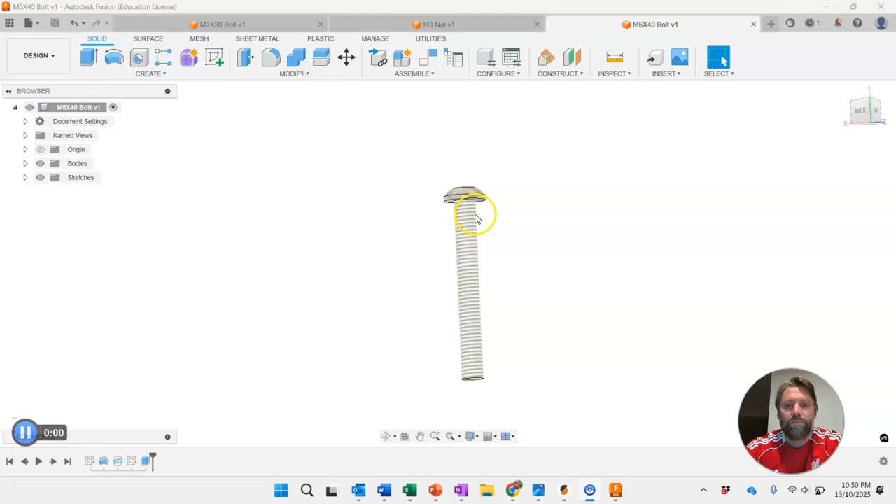Okay, so we're going to create a matching nut for this M5. It's going to be slightly different, right? We're going to use a dome head nut, because it sits out the back of the wheel, sort of exposed, and you might end up rubbing your hands on that part of the design. You want to make sure it's sort of covered and protected, so we're going to use a dome head nut. It's a nice way to finish off a part, so I'm going to use a couple of these dome head nuts.

So I guess when we create this in Fusion, jump back across, we're going to start off with a revolve. We're going to start a sketch and draw it from either the right or the front plane.

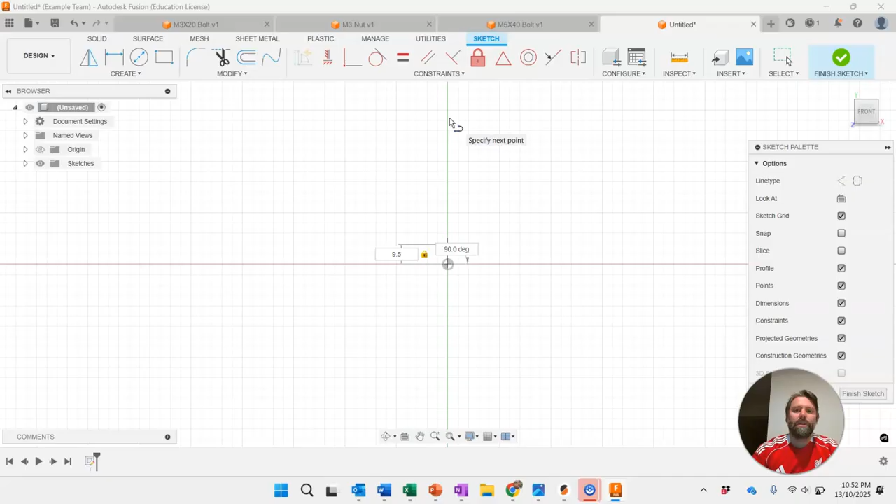And this part, I'm drawing a line to start with, which is going to be 9.5, and that is the overall height of that nut. So that's the very top of the dome there, and that's the very bottom of that. This is going to be a 7mm diameter, so we're going to come out 3.5 millimeters.

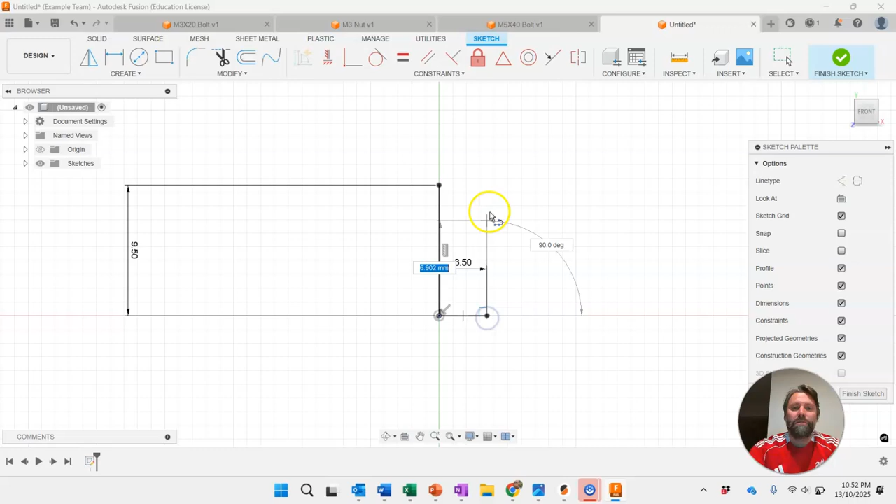And we're just going to draw a line directly upwards, and the length of it doesn't matter at this point. We're going to create a circle now, and it can be anywhere along this line except for the middle.

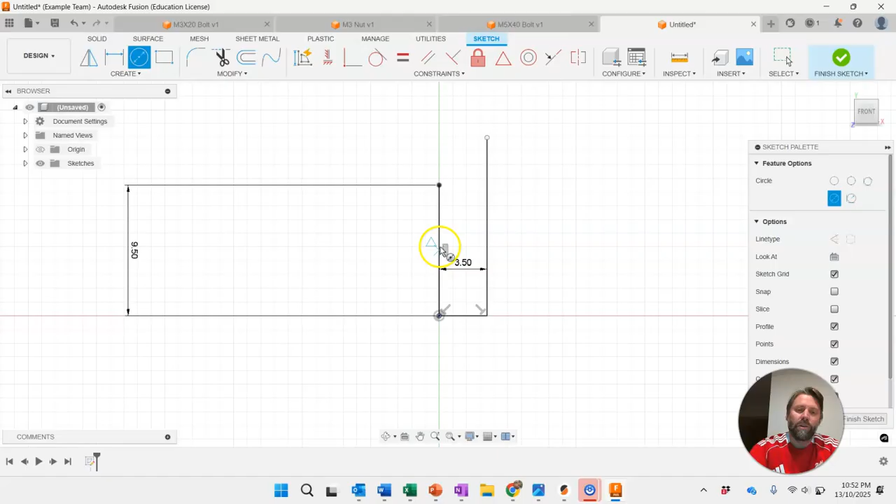We don't want it to lock to that middle point. As you move along that line, you'll see a little triangle pop up, and that will create an automatic midpoint constraint which locks this circle to the middle of that line. So you want to avoid that.

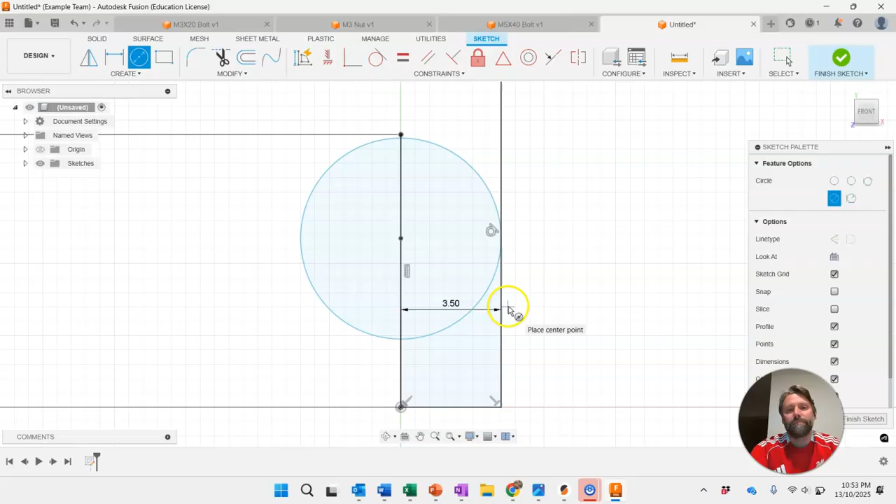We'll just go slightly above it and come out to the side. What we've created now is a tangential constraint between this circle and this line here. Now we want to create another constraint to ensure that this line goes through the end of this one.

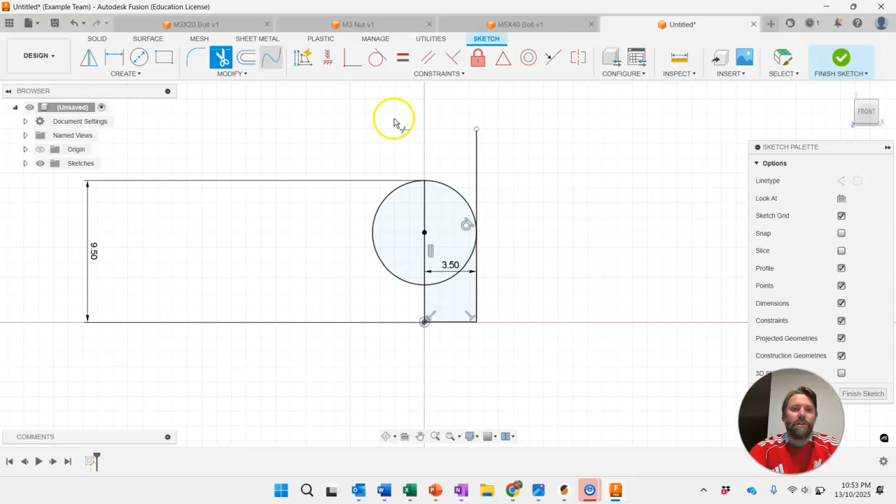So we've got a few extra bits and pieces in this shape which we don't need. We're just going to grab the trim tool here - if you can't see it, it'll be in the Modify set, the pair of scissors - and get rid of all the elements we don't need. Pop on this purple line.

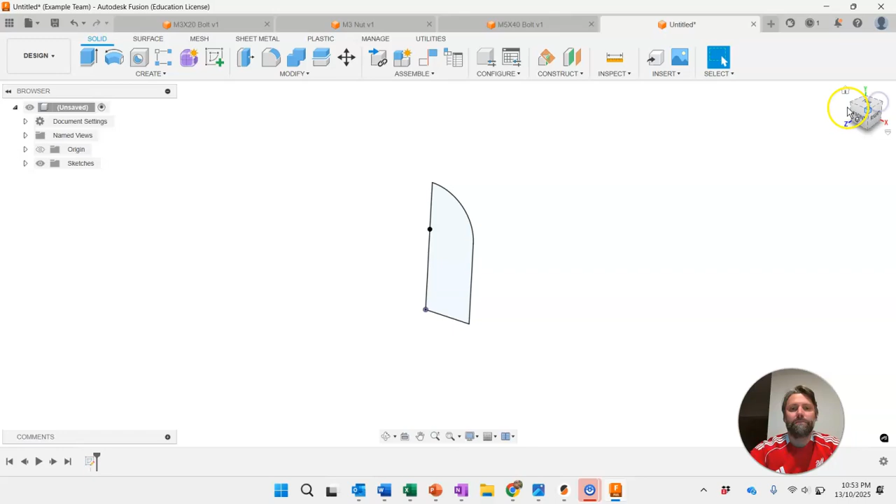All right, so we're good to revolve on this now. It is a solid profile, solid shape, so I can revolve. I'm going to revolve around this axis, so we'll finish the sketch and revolve. It's automatically picked up the profile - I just have to choose the axis to create that dome profile.

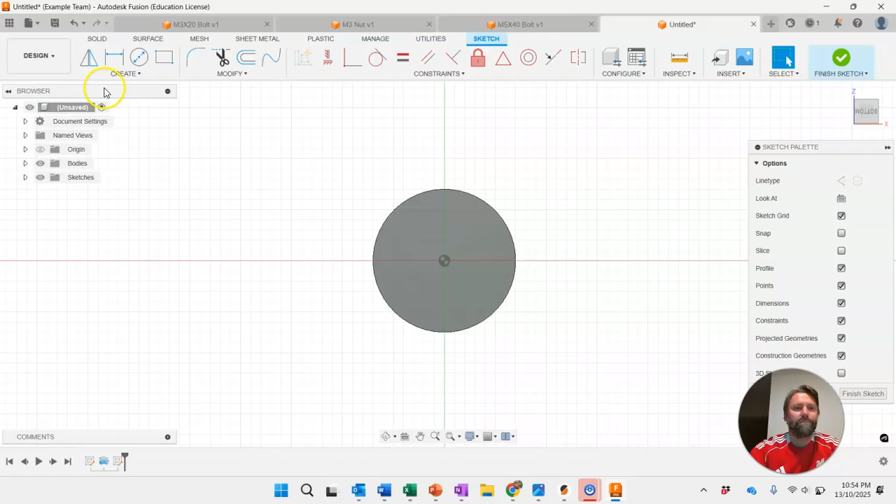Now on the bottom edge, we're going to create a sketch, and this will be the rest of the nut. So again, polygon - this is going to be 8, and enter. And we hit finish sketch.

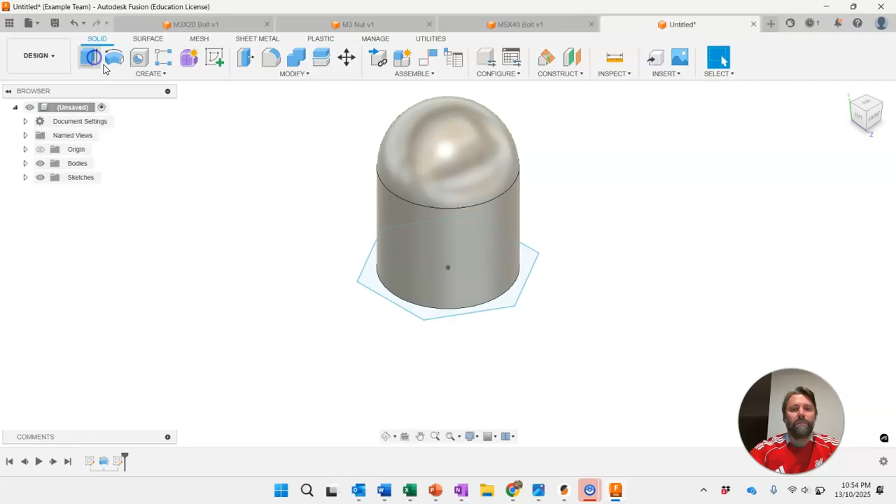Now drag this one up. It's also going to be 4 millimeters, or -4 in my case. If you put in 4 and it heads the wrong direction, just put a minus in front of it to move it upwards in the right direction.

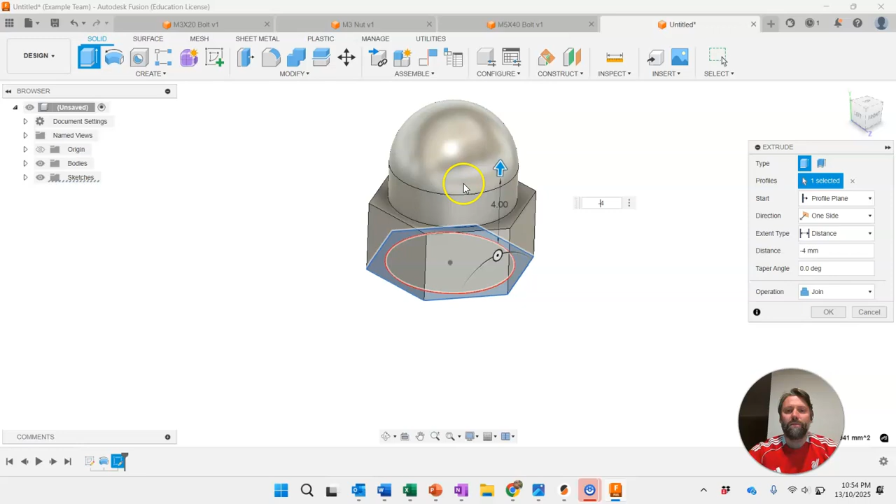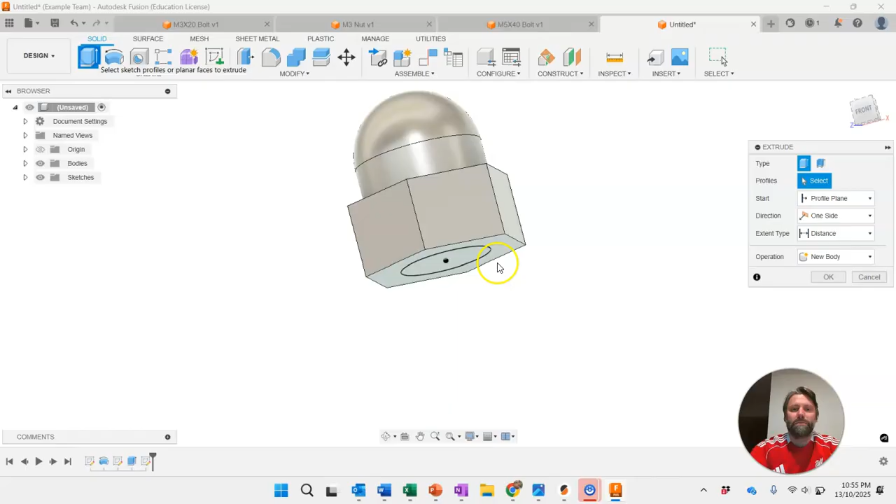And then we'll create another sketch on the bottom, which will be our hole, 5 millimeters. Finish the sketch. That's going to get cut into this profile - we've got 5 millimeters in this case.

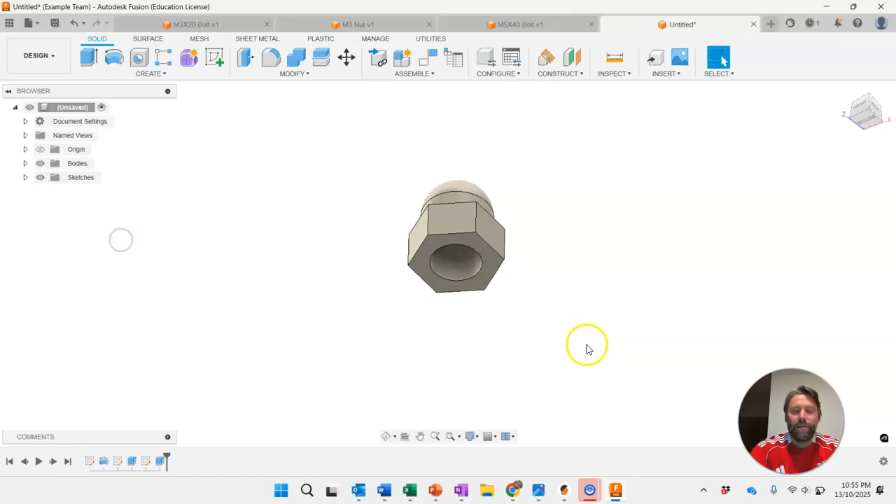Again, we can create a thread on the inside edge of that surface, automatically putting in the correct details, hit OK. And we're good to save this one as M5 dome nut.

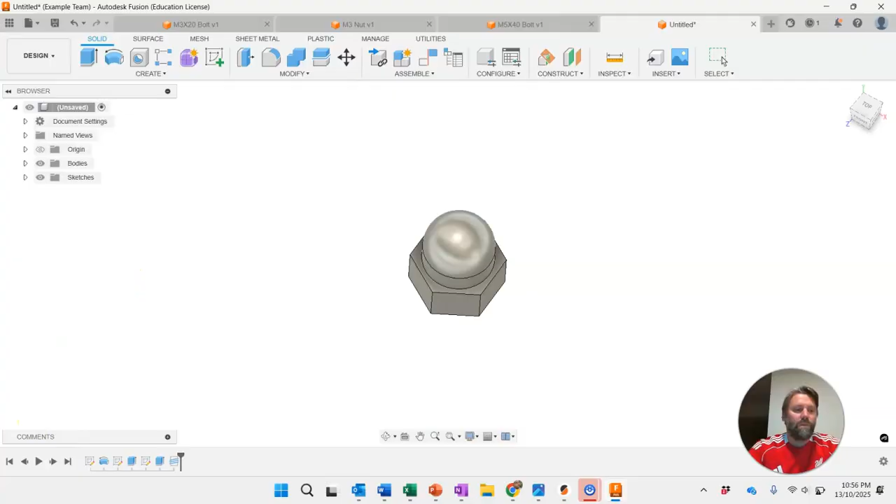Okay, got one last bolt before we're going to get into some other bits and pieces. Okay, so we're going to do...